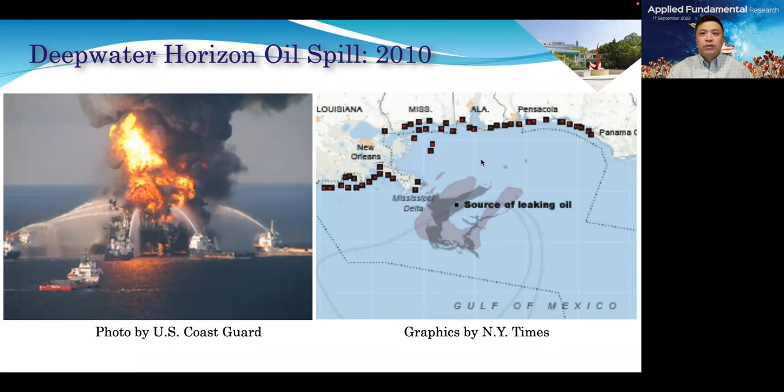This tragedy, and a chain of disastrous events in recent years like Katrina and the Indian Ocean tsunami, reveal the tension between human society and the marine environment. It also shows the need to further understand ocean phenomena.

After the explosion happened, several attempts were made to seal the leaking wellhead more than 1,000 meters below the water surface. No diver could reach the site. Therefore, several remotely operated vehicles, or ROVs, were employed to perform the operation.

The left figure showed one of the attempts where the ROVs were trying to install an oil collection cap over the well. The ROVs are connected to a supporting vessel through cables more than 2 kilometers long. The right figure showed one of the ROVs used in the operation, developed by Schilling.

The ROV is a powerful robot as big as a pickup truck. It takes several operators to control its movements through the cable underwater. Without these kinds of ROVs, the oil and gas industry cannot function in deep water.

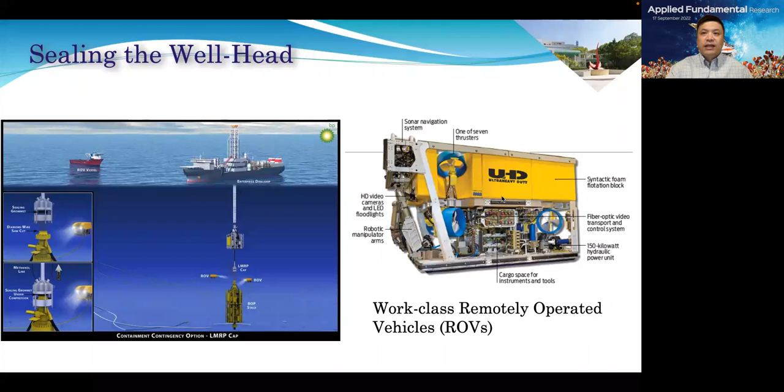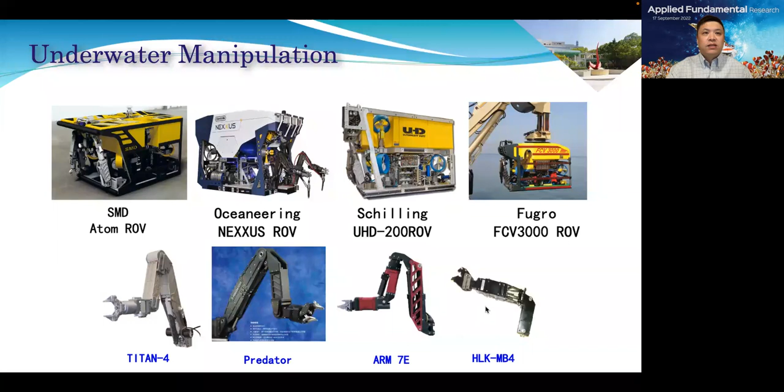The key technologies for remotely operated vehicles include the vehicle platforms and the underwater manipulators. Here I listed some of the major providers of the vehicles and the underwater manipulators. Each of the ROVs costs about 10 million US dollars. Until today, the global market for work-class ROVs has been dominated by European and US companies.

After the wellhead was sealed, it took more than a year to clean the oil contamination. My team at Georgia Tech participated in the pollution monitoring effort in 2011.

One year after the oil spill event, my team went to the Grand Isle State Park, where a tidal lagoon is connected to the ocean. Polluted ocean water flowed in during high tides.

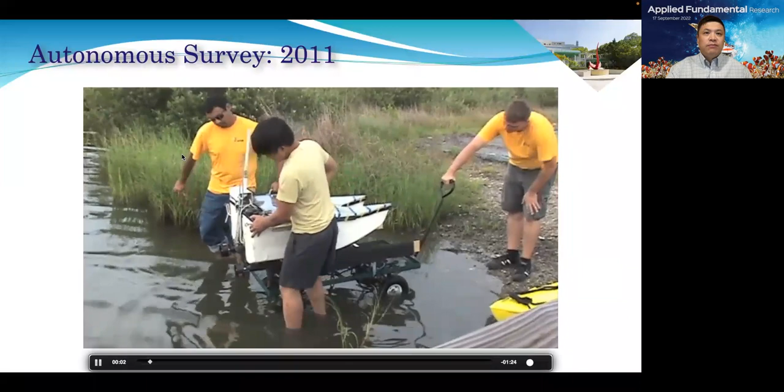This video demonstrates an autonomous surface vehicle developed by our students in 2011. The vehicle hosted an optic-based oil spill sensor that could measure the level of oil concentration on the water surface. The autonomous boat was able to track circular and straight line trajectories to survey the area.

We performed the experiments during the summertime in 2011. The temperature was nearly 40 degrees Celsius, and there were many mosquitoes in the survey area. This is why we need to develop marine robots to perform these survey tasks instead of having human beings do it.

We observed a low level of oil concentration on the surface of the lagoon. This level is not immediately toxic, but it may have longer-term negative impact on the environment and the wildlife around the lagoon.

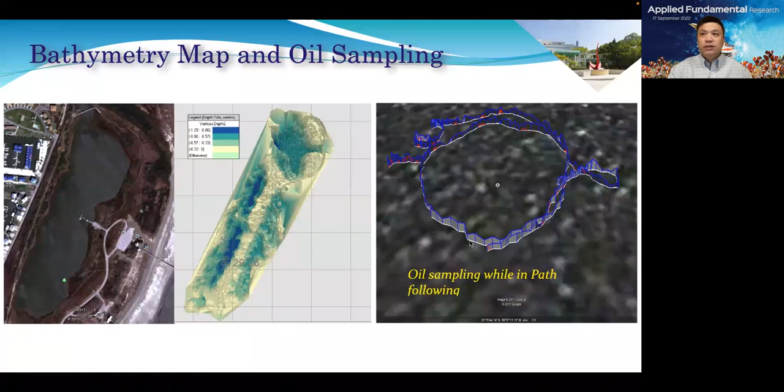The oil spill event reflects the tension between human needs and the ocean environment. Human society has always looked to the ocean to satisfy our needs. As resources on land deplete, we see increasing demand for ocean resources: oil drilling, underwater minerals, aqua farming for more fish, transportation needs, and energy harvesting needs.

Marine robots have great potential to address these needs. Robots can help divers stay safe and move like dolphins. They can explore the deepest parts of the seafloor, and inspect fish farms to keep our food source secure. We see increasing needs for marine robots in port operations, wind and wave energy harvesting, and aquaculture. We need marine robots to offer great services for humans to achieve self-fulfillment and a better life.

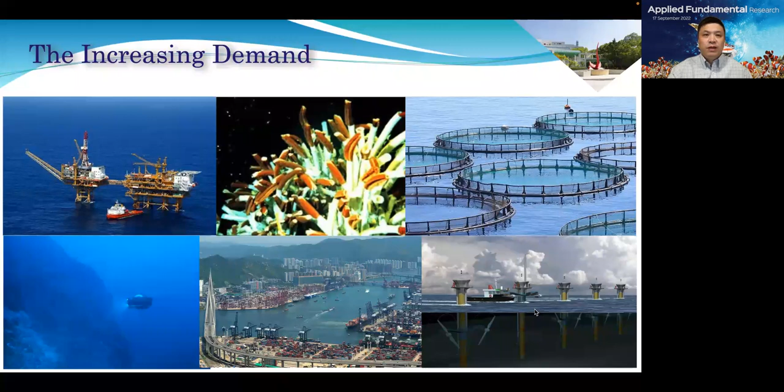To answer the great challenges in the blue economy, marine robots must deal with great difficulties associated with a highly unpredictable ocean environment. I'm often asked: why is marine robotics so difficult?

First, communication underwater is very difficult. Electromagnetic waves cannot penetrate seawater. Hence, underwater communication, sensing, and localization have to rely on acoustic signals. Compared to electromagnetic signals, which operate in the megahertz and gigahertz range, acoustic signals have very low frequency in the kilohertz range. The bandwidth is quite narrow, and the bit rate of communication is very low. Therefore, communication and localization performance underwater is very poor.

Another severe constraint for ocean observation is limited power. Since the ocean is constantly moving with waves and currents, marine robots need to consume more energy than their counterparts on land to move around. However, obtaining power in the ocean is quite difficult too. Future developments in marine robotics have to answer these great challenges.

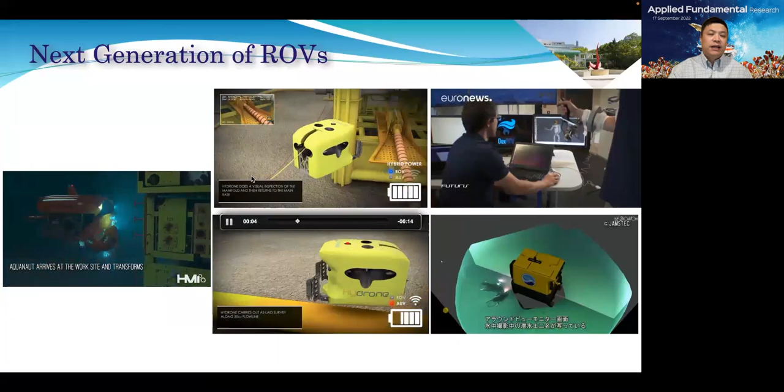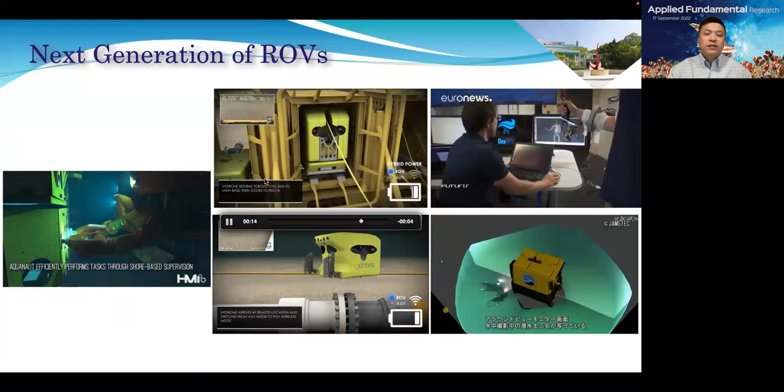ROVs can switch between tethered and untethered modes depending on mission needs. The vehicles can autonomously go charging when needed. Having the ROVs reside on the bottom can significantly reduce the overhead of deployment and recovery.

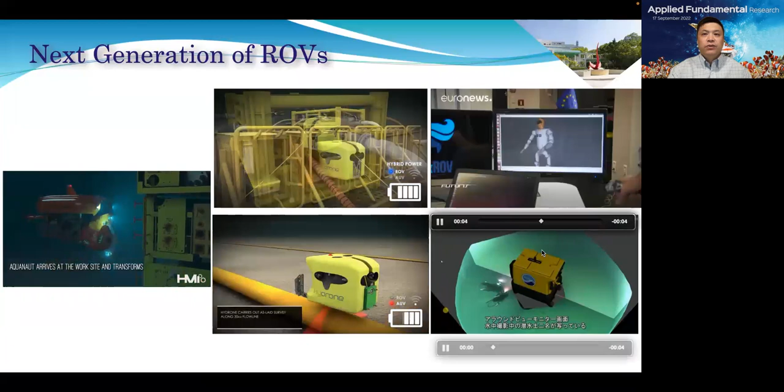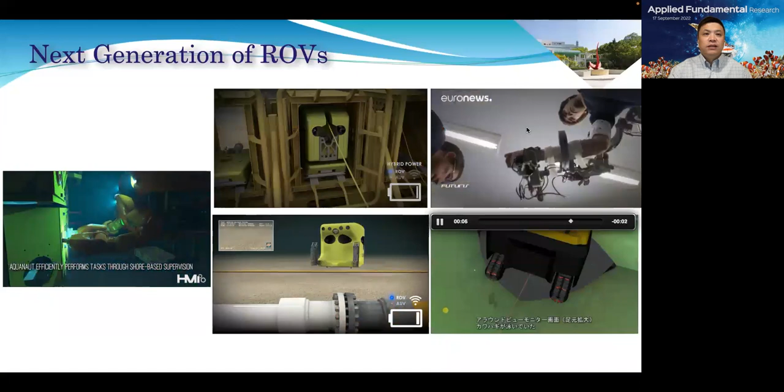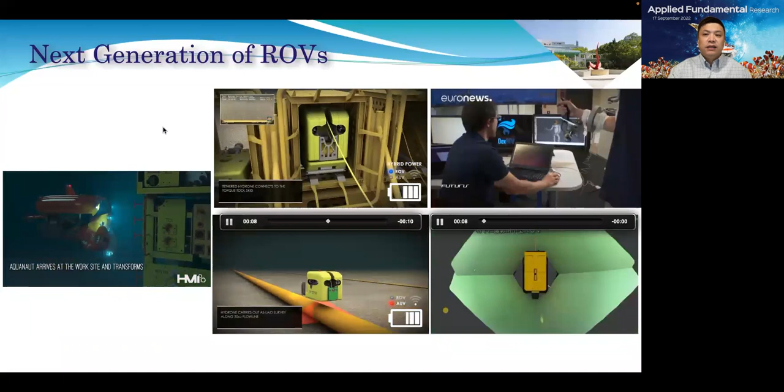The right-hand movies show research to reduce operator workload using modern human-robot interface technology. Operators can control the movement of the robot arms through master-slave arm-hand movement. The vehicle can also use full virtual reality capability to reduce the human operator's workload, making operation in the undersea environment much easier.

Other than underwater manipulation, we also need to more effectively collect information from the ocean. The ocean is vast and ever-changing. So far, only a small portion has been explored by mankind. Ocean observation requires a lot of sensors, and we need these sensors to report data back to us. Hence, the sensors need to form networks to pass data from the ocean to us.

Up to now, there are two types of sensor networks. One is a static sensor network. In certain locations of the coastal ocean, long and thick backbone cables have been installed on the sea bottom, providing power and communication support. Junction boxes are installed along these backbone cables, and each junction box can host a set of connected sensor nodes, providing them power and communication support.

Another type of sensor network is the mobile sensor network. Instead of being installed at a fixed location, sensors are carried by moving platforms, many of which are robots that can fly in the sky or swim in the ocean. While moving through the air or water, the sensors on board collect data from the ocean environment, with the platforms providing power and communication support. Mobile sensor networks can be deployed at different locations according to sensing needs, but operation time is limited by the amount of power available for each mobile platform.

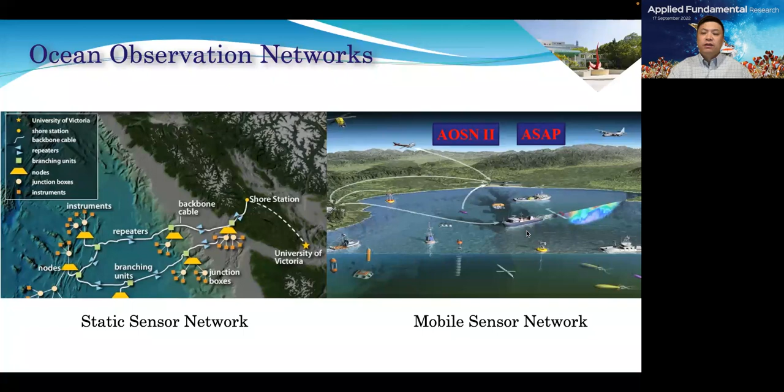One of the most popular marine robots for ocean sensing is the underwater glider. As the movie shows, underwater gliders move in the ocean by changing their buoyancy. The joint force of gravity and buoyancy creates a sawtooth trajectory that consumes very little energy. Gliders can operate in the ocean 24 hours, 7 days uninterruptedly for months or even years.

Hence, it is a perfect platform for ocean sensing and data collection. A glider can host a variety of ocean sensors to measure the physical properties of the seawater and the biological contents. Underwater gliders can also host acoustic communication devices so that they can communicate and transmit the sensor readings in real time back to us. Underwater gliders have become one of the most important ocean sensing platforms in recent years.

Other than the underwater gliders, other types of long-duration ocean observation robots have been developed in recent years. For example, the wave glider is a surface boat that is able to harvest wave energy and solar energy. The Saildrone is an autonomous sailboat that is able to use wind energy to move around and to collect data. These platforms can form a three-dimensional observation network with underwater gliders.

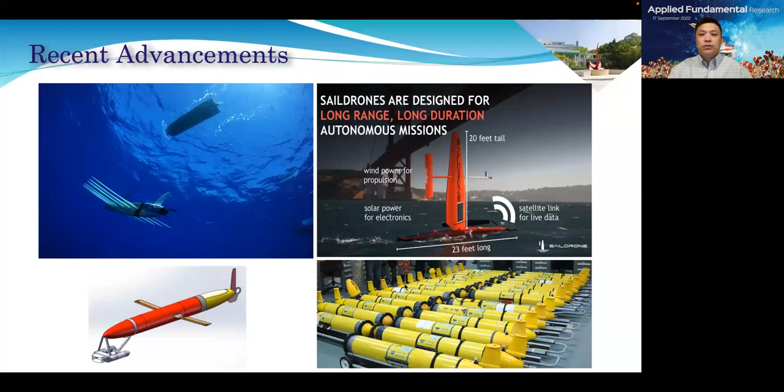How can we make these marine robots move and operate autonomously? A marine robot usually comes with an autopilot software that provides basic functionalities, such as moving to a specified GPS location called a waypoint, to enable autonomous ocean sensing. This functionality is not enough.

Another feedback control loop needs to be added. We call this loop a cyber cycle. The goal of the cyber cycle is to use all the information available to provide guidance for the marine robots. First, measurements from the available sensors in the network are collected. Then these measurements are used by ocean models through a procedure called data assimilation. The measurements are used to generate future predictions of the ocean states by the ocean models.

The ocean models are usually computed by high-performance computers. The model prediction is then used by autonomous planning algorithms to generate waypoints for the robot. Once a list of waypoints are received, the robot uses its autopilot to move about and reach the waypoint. This process is run iteratively.

Every time a new set of measurements are available, the cyber cycle will be triggered to generate a new set of waypoints for the marine robots to follow. This way, the robot can perform autonomous sensing in the ocean guided by the ocean models and the sensor information collected. This autonomy architecture also connects the edge computing performed on the marine robot and the cloud computing performed by computers running ocean models.

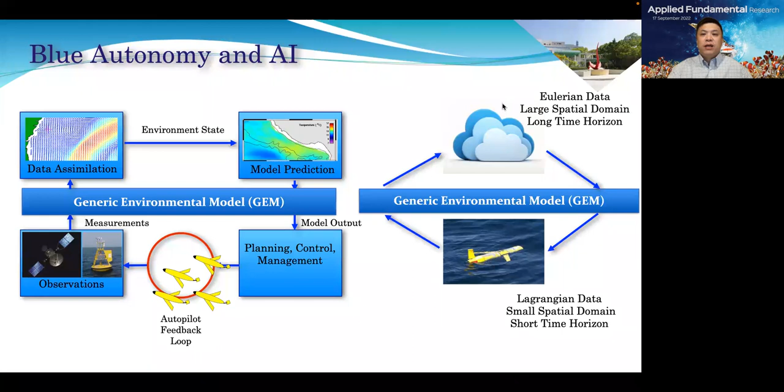When we have more collected data, we can apply AI and data-driven technologies to generate something called a generic environmental model, to bridge the gap between edge computing and cloud computing. Our goal is to reduce the number of human operators in an ocean environment through AI and data-driven methods.

The autonomy for swarms of marine robots has seen measurable success in recent years. Since 2015, my team has been supporting underwater glider missions to observe the coastal ocean in the southeast region of the United States. We have been providing autonomy service for the glider deployments.

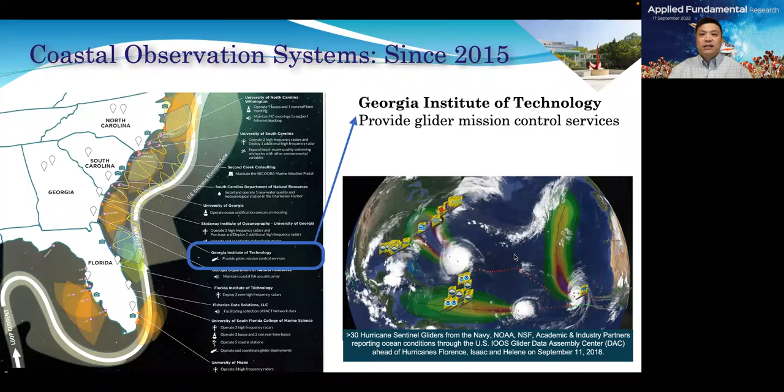Here I want to give one example. The figure shows a 2018 mission in the North Atlantic Ocean, where more than 30 underwater gliders from NOAA, NSF, and the US Navy were deployed to observe 3 hurricanes at the same time. These robots form data collection networks that provide useful data to make more accurate hurricane predictions. Based on the data, stakeholders and policymakers can decide whether an evacuation plan is needed in certain coastal areas when a hurricane comes.

Given all these recent developments, our goal for the future is to send more marine robots to the sea, not humans. I would like to point out that the research community for marine robotics has been relatively small historically. Rapid recent growth has been observed worldwide.

Also, most existing marine robots are developed for the oil and gas industry, Navy applications, and scientific explorations. There are very small numbers of marine robots for other applications, mostly in the fundamental research domain or early stages of industrial prototypes. Therefore, there are many opportunities for new business developments in marine robotics for the blue economy.